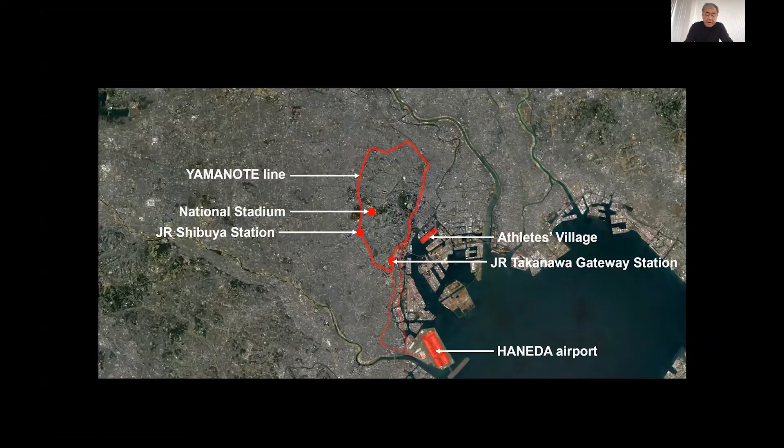Before COVID, everybody began to think the city is too big, the towers are too tall, and we are too far from nature. So the basic idea for the stadium was how to go back to nature, how to go back to natural materials, and how to open the building to the environment.

Our solution was to use wood, especially local wood. Japan is a country of forests—still now, 70% of our land is forest. I want to show this unique environment of Japan.

We used wood from 47 prefectures of Japan—this is cedar. Each cedar from the 47 prefectures has a different color, different texture, and different grain. I want to show that kind of diversity—even in a small country, we have such diversity.

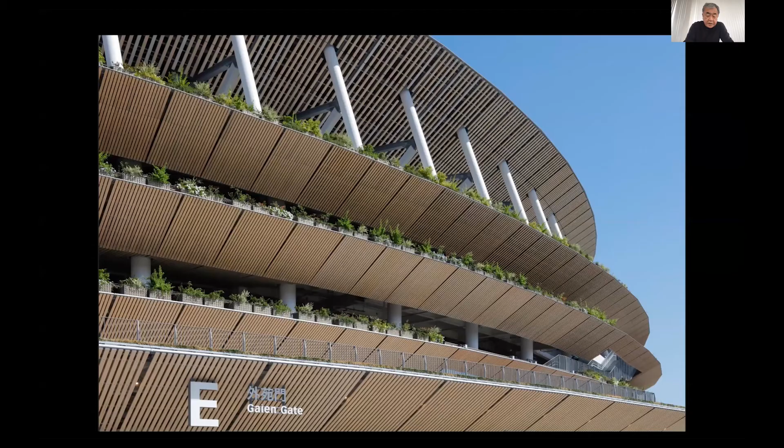Already 1,400 years have passed since the building's completion, but it's still surviving. The secret is the unique section of the building—the wood is protected by this unique section, and people can also enjoy the beauty of the wood, the beauty of its detail and texture. So I want to do the same magic for our building.

We also tried to integrate vegetation with the material and the big building. Even for this big building, we believe we can integrate it with the environment and nature. We also tried to create public space in the stadium.

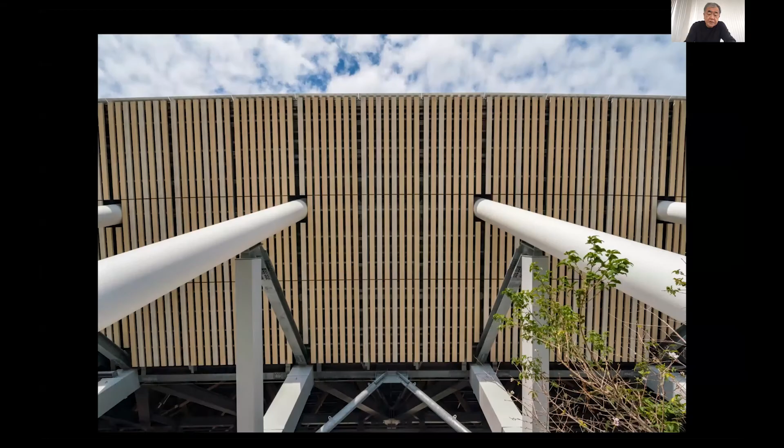Most sports buildings are enclosed when people aren't doing a sports event, but this stadium is open to the public 365 days a year. Openness and publicness are the themes of this building, and even at nighttime, it's just open to the public.

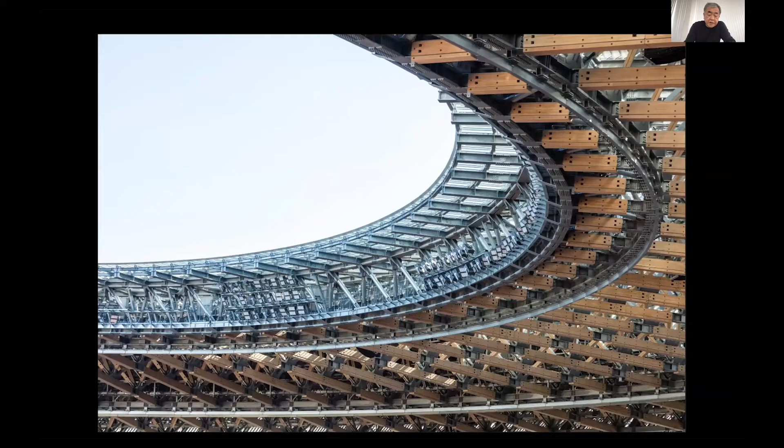We tried many new materials for the building. The roof is supported by a composite structure of wood and steel, so we could achieve lightness through this kind of composite structure system. At the edge of the roof, we have a new transparent type of photovoltaic panel—it looks like normal glass, but it has the same efficiency as a normal photovoltaic panel.

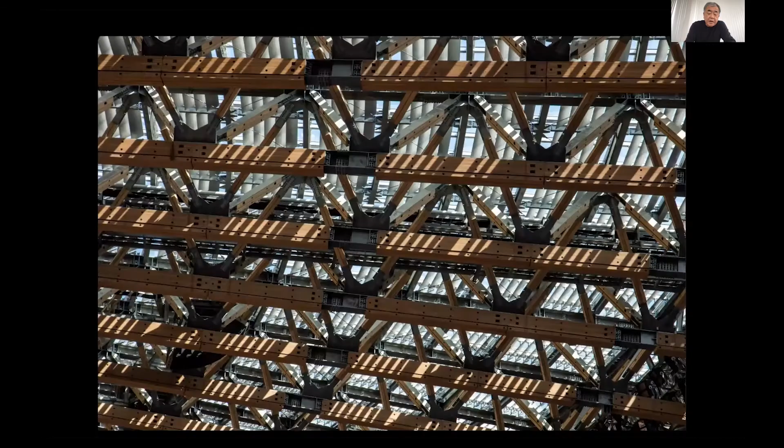And our idea is by using new design, by using new technology, and going back to nature again. Before COVID, we began to think like this, but COVID pushed us further in this direction. COVID is a big turning point of history, I think.

Generally, the history of Homo sapiens goes from centralization to the city. We started from hunters and gatherers, then agriculture started, then industrialization started, and the big cities started, taller and taller. But finally, this kind of centralization brought us to a big crisis.

The theme after COVID is how to go back to nature and how to go back to the forest. This stadium can be one example of that kind of new direction.

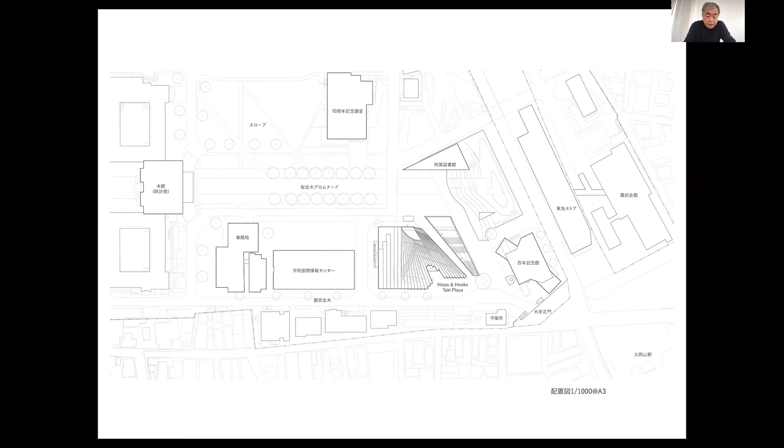Besides the stadium, we are trying to find another solution for how to go back to nature. This is a very new project we did for Tokyo Tech, a big university in the center of Tokyo. We designed this hill-like building, and the building merges with the surface of the ground—it's not outstanding at all.

This is the detail of the building. Topography is the theme of our architectural design, and at the same time, we are very much interested in the detail of the ground surface.

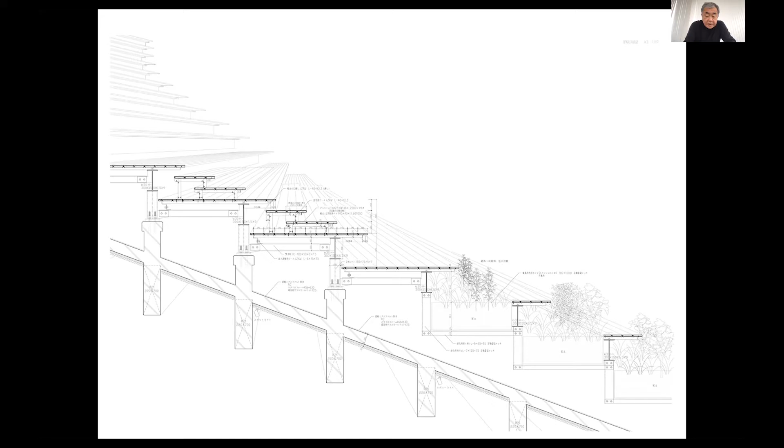Today, I want to pass this theme to Balazs Bognar. We've been working together for a long time, and he sometimes brings this idea to a different context. I think this cultural exchange is very interesting for us. I want to talk about one example of this cultural exchange.

Frank Lloyd Wright—maybe you know that great architect—he came to Japan many times, and he learned the Japanese traditional architecture, and he tried to apply those Japanese ideas to an American context.

We also try to do the same exchange in a different period, and Balazs is working on that kind of trial. Maybe he will explain the process of that kind of exchange and translation. After COVID, that kind of exchange will be more important than before, and today he can talk about what we can do after COVID.

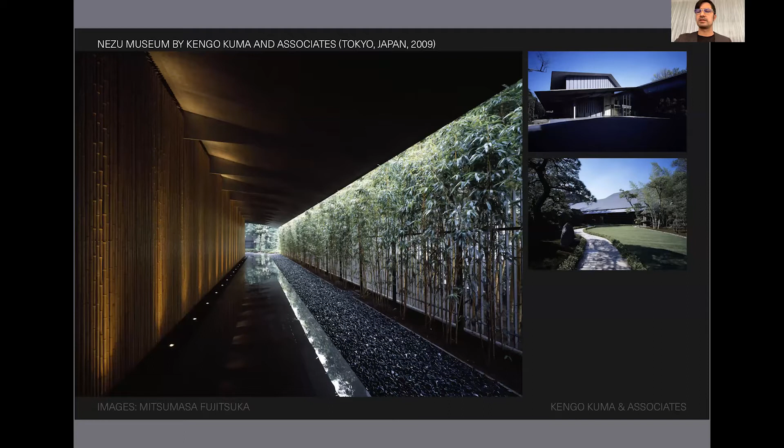I'm going to bring you now to Portland very briefly, where if we were to summarize the project in one phrase, it's that we simply reconnected a pathway. We connected the dots. Let's spend a brief moment here.

What we simply did was connect all of those dots so that the formal entry, the ticketing, was brought all the way down to the road, unlike before. The preamble to the antique gate was set up in a more honorific way. And then before one enters the main gate, the upper main gate, we provided a village, a series of buildings that framed a space and framed the existing gardens beyond. Let's take a really, really brief walk up that hill.

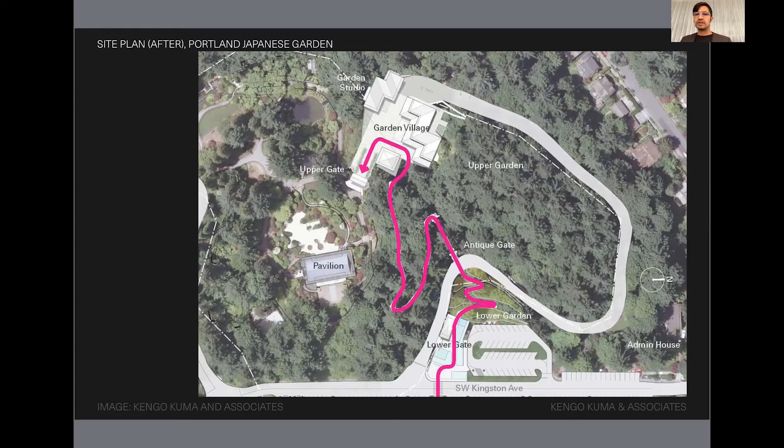I'd like to give you a sense that it's about the space, it's the continuity, it's about an approach and a sequence more than the individual buildings themselves.

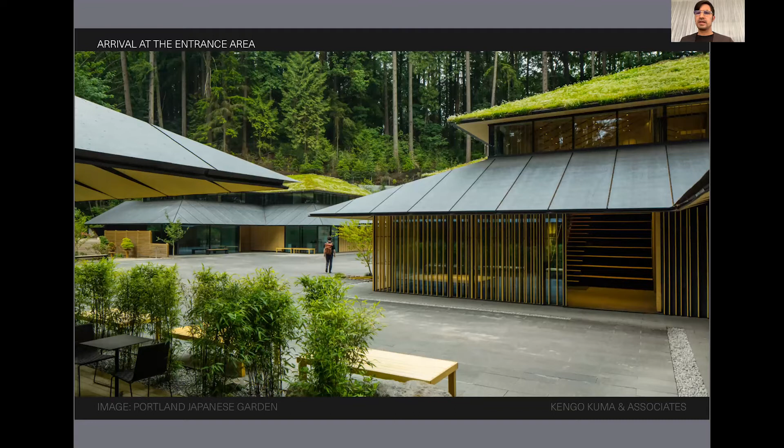The ascent leads us to the tea house over there on the left, again peeking out behind the tree, reminiscent of Kyoto's Kiyomizu-dera, peeking out over the ravine. The entry there is flanked by the two buildings, the third one there in the beyond. And again, it's really important here: it's not about a monolithic architecture, it's about the space that it defines.

Let's take a look at that in plan. I've artificially highlighted the zigzagging so you can see that the roof line, the way that it's modulated, basically disappears back into the landscape. It defines two key spaces: that kind of driveway drop-off courtyard, what we call the second main entry over there to the left, upper left, and the courtyard over there on the lower right. The arrow pointing out there was the view from the previous slide, and that's the position of the main gate.

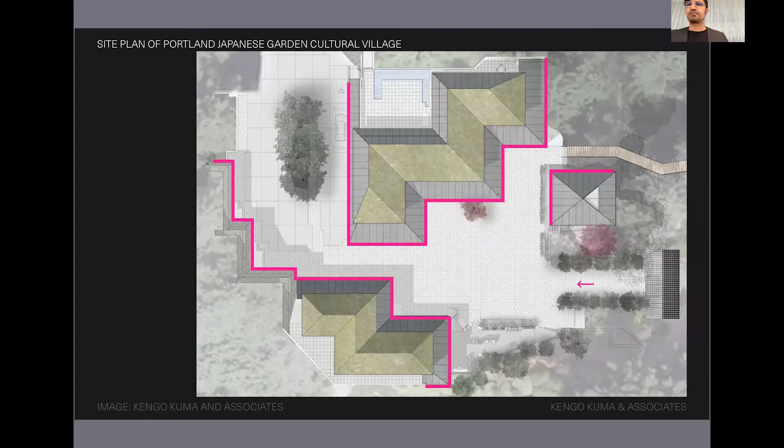This is also echoing Kyoto's Katsura Villa, and of course from many, many centuries before. This is precisely the same scale as the previous slide, and the north arrow orientation is roughly the same as well, so you can see that there are kind of reverberations across time.

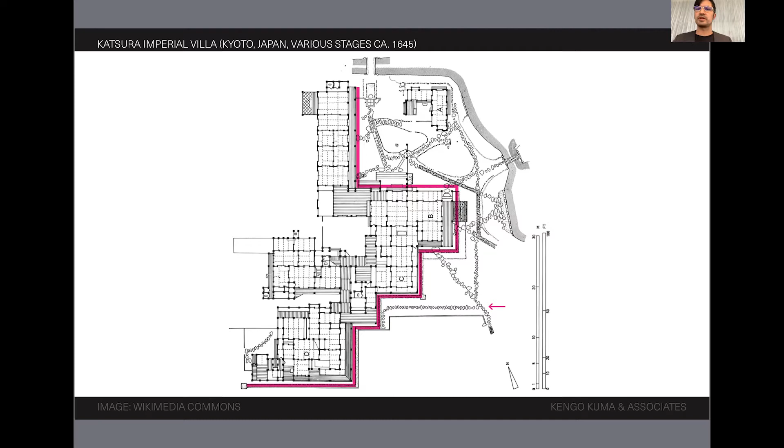This kind of technique is really important in being able to hold space. The zigzagging line in Japanese is called ganko yane, the formation of the flying geese. That magenta arrow will then give us the view on the next page. You can see that a larger volume is broken down into smaller masses by way of the roof line. It also starts to define the space, kind of what I like to call the inside crook of the elbow, and creates a whole series of outside corners as well. It gives a sense of depth, a sense of intimacy and human scale.

The big difference, of course, is that Katsura Villa was elevated on a level much like a piano nobile, whereas a similar sort of view in Portland Japanese Garden is contiguous with the ground. So there's a free flow of people and activities across the corners and across the boundaries.

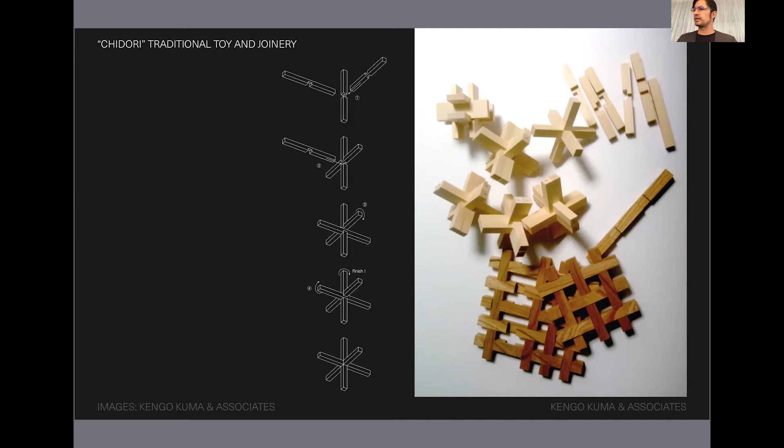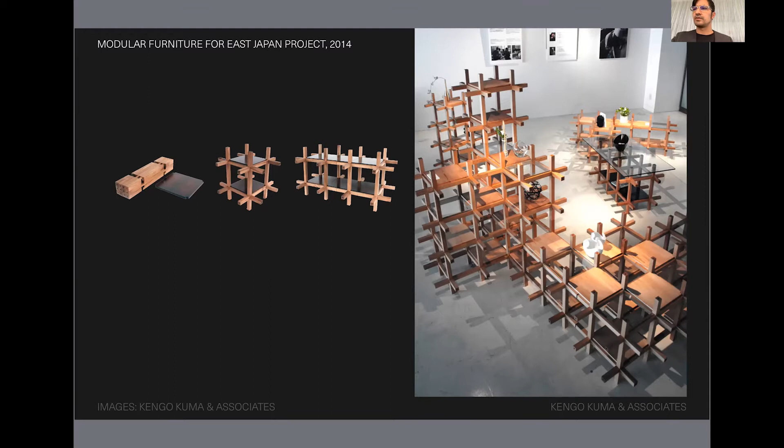We asked ourselves, what happens if you take that same joint and make a modular furniture set from it? This is sort of an experiment. For those following the dates, please note this is not intentionally chronological, because the ideas come about and develop at different stages. What I'm really interested in showing you is a kind of evolution—work that is not so much about an individual design, but the way it grows and tunes itself over several projects. There's a photograph of the single piece against a kind of palette of several of these pieces, with the notches shown in the background.

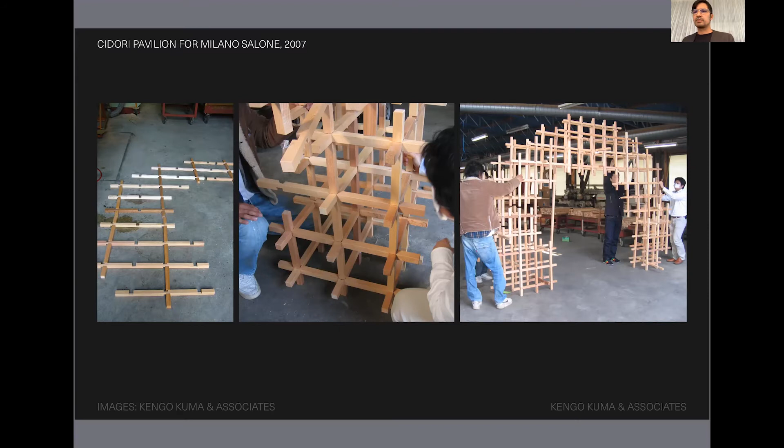And this is for Salone in Milano in 2007. You can see here the system of putting it together requires no mechanical fastenings or adhesives—you just lay out the pieces, slot and rotate them together, and the layers of the pavilion are put together by just a few people. There is the pavilion in its final form.

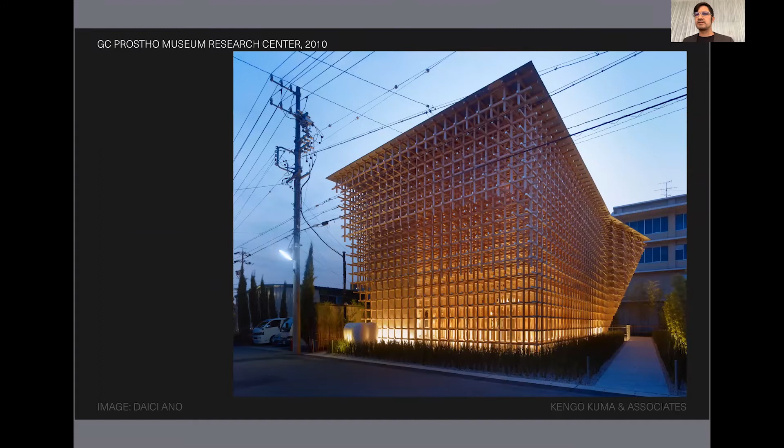If you increase the scale, going from pavilion, an experiment at a smaller scale, growing to a larger scale here with architecture, this is GC Prostho. That same dimension is carried through to this building with the 2 inch by 2 inch components carried over at 0.5 meter spacing, which is just a little under 2 feet.

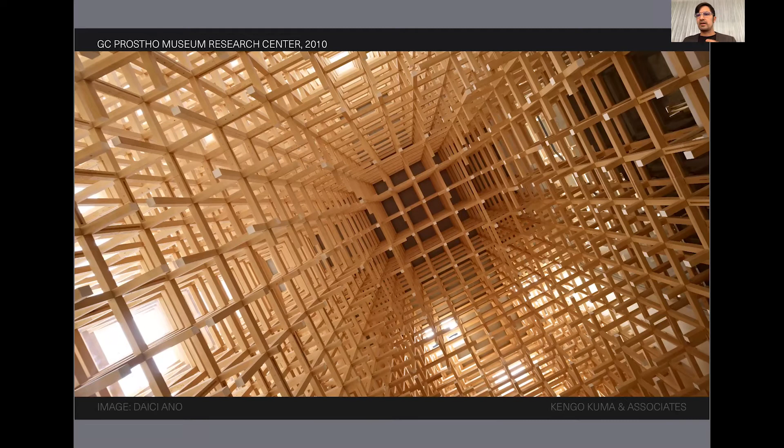This building is entirely defined by this lattice. It's a structural grid, and it's treated, so it's fireproof. The actual physical boundary of glass is slotted between and interspersed so that you would never really detect it visually. This is a look up into the space. You can see it's almost a magical view, really talking about infinity. It's purely about that joint being repeated.

The region after World War II saw a resurgence of the cedar trees. The reason this is important is that there was a surplus, right? There was deforestation, and then the trees were replanted. They're fast growing. The surplus compelled the city to ask offices such as ours how is it that we can display some of these? How can we show our technique?

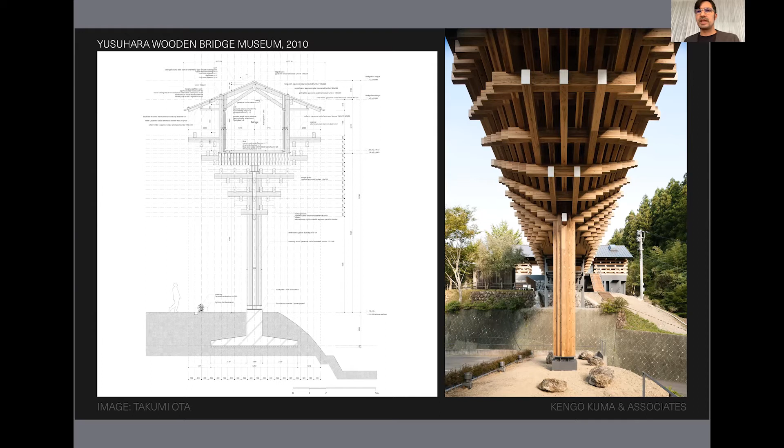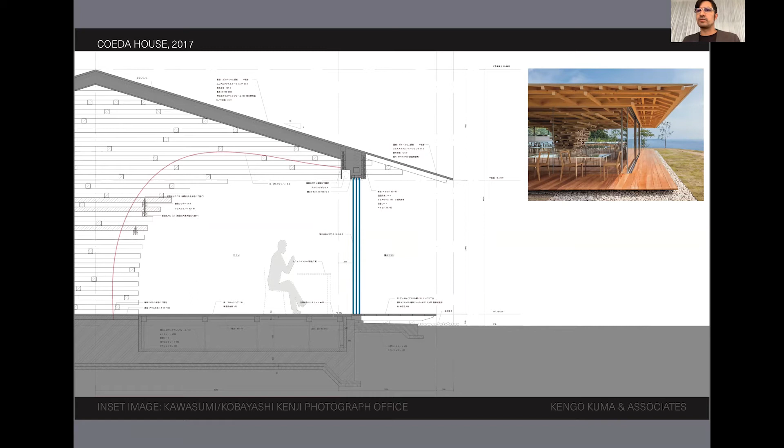If you look closely at the section, there are two vertical lines within the body of that assembly, and those are the few mechanical fastenings of the central pylon, as it were, in the middle. At night, all of this disappears, so really we're talking about an assembly, a kind of light piling of wood, and the only metal columns that appear to be mullions occur at the 4 corners. Again, those dimensions have been minimized to a nearly impossible 3 inches by 3 inches, just to show off the capability of the material.

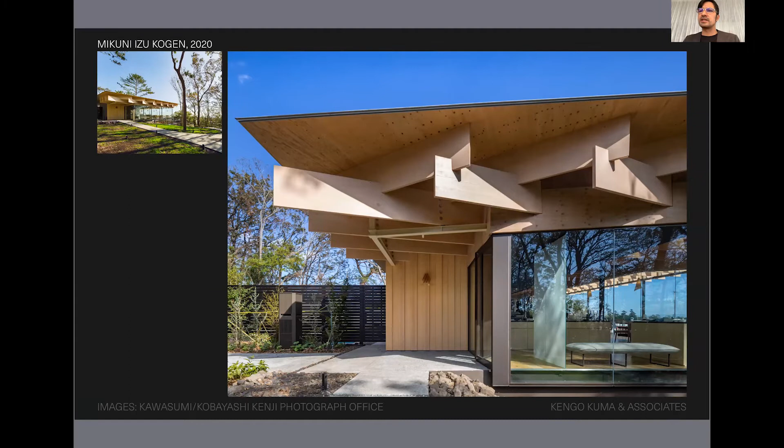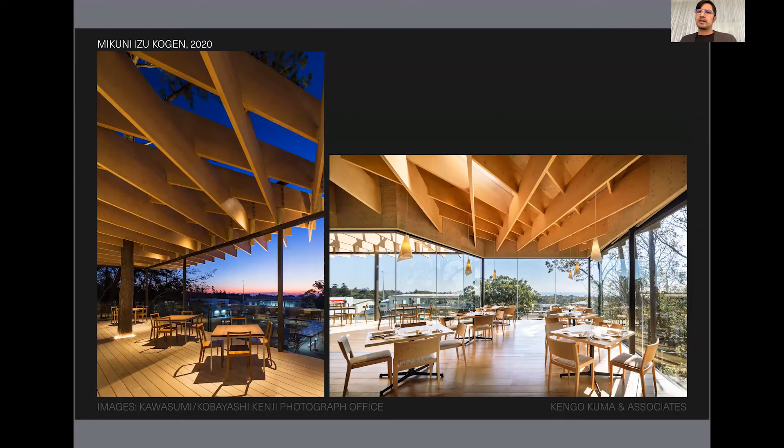That detail is made possible here. If we zoom in on the entry area, we can see that these larger, thinner, and flatter boards have slotted together up at the top, creating effectively two structural layers that continue all the way through. They span up to about 11.5 meters at their longest point. Be that as it may, all of these force lines and the way in which these two layers cover the space draw the eye outward towards the panorama beyond.

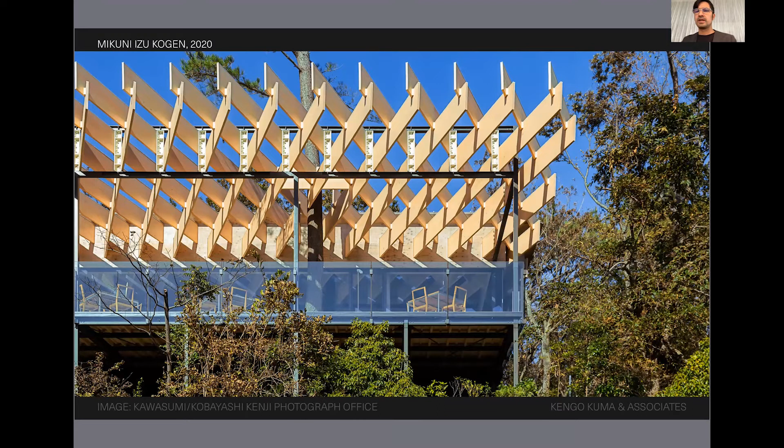There is that view again, and you can see there's a hybrid steel and wooden frame assembly there, primarily taken care of by the wood, but we've also provided this hybrid combination structure. I'm going to take that same detail now, and our question is, what happens if we simply flex all of those lines into three directions?

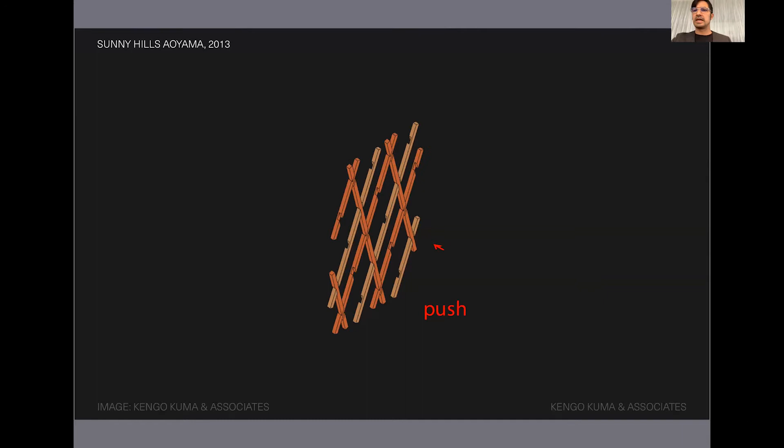This depends on a kind of slotting or joinery technique called jigoku gumi. Jigoku gumi, if you took that almost as the literal translation, means a kind of hell joinery. And it's not hellish because of its difficulty. It is so because once it's assembled, you cannot take it apart again. So there's its first layer. There's its second layer as it comes through. And just remember, with each subsequent layer, we are reinforcing the direction of stability.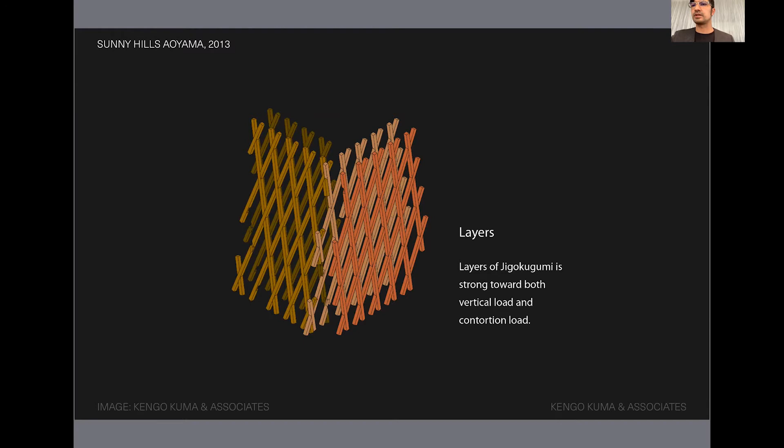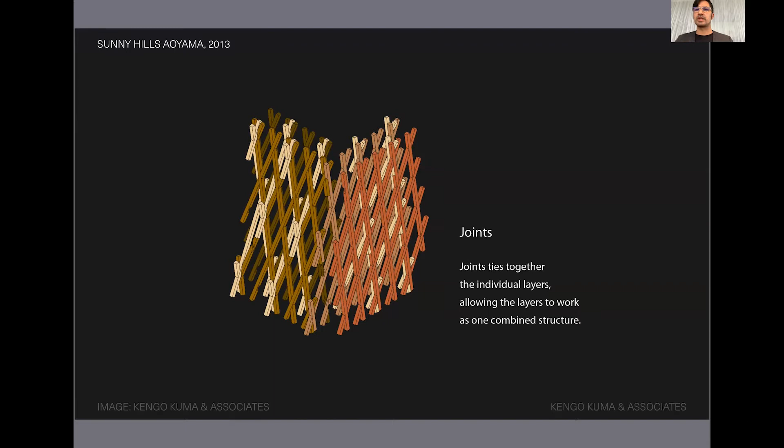If we then add 2 layers of this and turn the corner, we are starting to introduce stiffness at the corners. And then again, they are connected in that third intermediary direction with that lighter layer there to provide stiffness that then basically creates a unified whole.

This is a picture of that section as it's all come together. Again, for those of you interested, all of this was modeled very heavily in Rhino and going back and forth between the engineers. Part of the aspect of the hellishness was maybe in the number of iterations to get that right. You can see though, that beyond just drawing and calculation, you can see that kind of cloud-like ephemeral effect on the left.

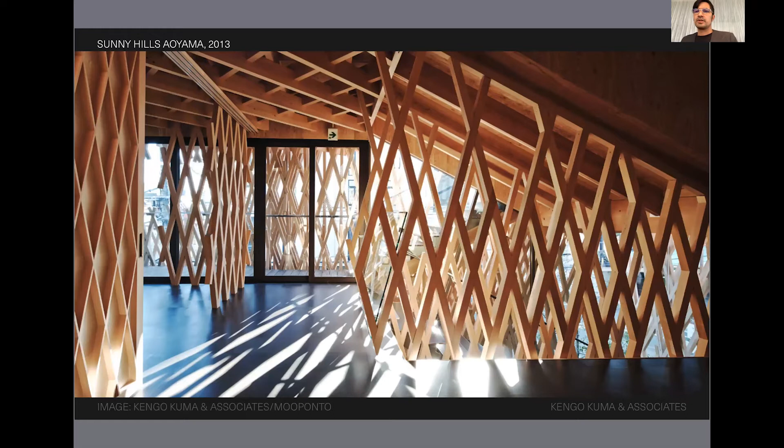Here you can see that structure, that joint I'd shown you before. Earlier it was a toy, then it became a smaller pavilion, then a bridge, then a series of these smaller structures. That now is talking about the joinery not only as a material atmosphere, it's an overall environment, it's about the light, it's about the structure, it's the skin. It's now doing a number of different things, almost in a redundant manner, but it's now gone from kind of an engineered assembly to a level of poetry that we do try to achieve.

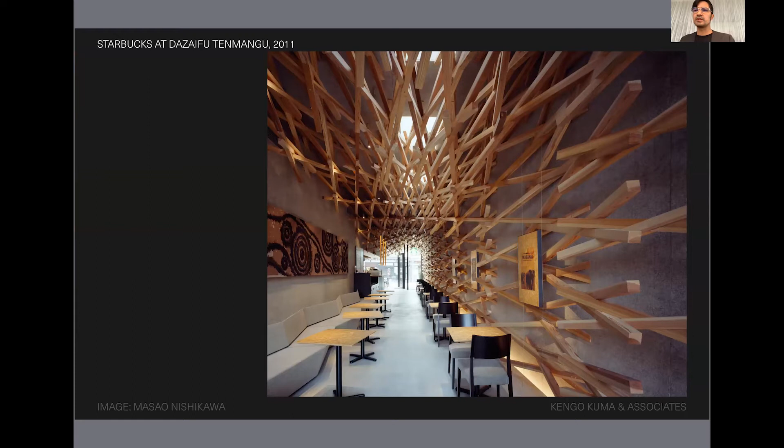What happens if we simplify some of that? Let's take that same detail, pull it apart a bit, turn it to the side. We are now at Starbucks in Dazaifu Tenman-gu. This is in Fukuoka Prefecture, and it's again along a major thoroughfare leading to the shrine. You can see here that material has been pulled apart almost to a much lighter degree, so the density is really quite light compared to what we'd seen at Sunny Hills.

This is not as structural as in the previous example. It does borderline on decoration, but what we're after here is a particular showing of the material. Remember, even though we can model this digitally, somebody has to make this.

In our case, we were working very closely with craftsmen to be able to cut by hand tools that three-dimensional joint, and to be able to cast it over the space of the cafe. So that's very important.

It is self-supporting, but it doesn't give structure to the roof above. You can see the light coming down through the skylight to show that off. So there's the view from the street.

Some key points to remember here. We've taken a look at a single joint, and again, this is one of many. It's an idea that grows across different scales. We tune parameters, adjust them, try to investigate the possibilities and limits of material, especially with regard to where the material came from, its location, and simply playing with the sizes.

It's an evolution. It's an economy of material, and we hope it has to do with a kind of spatial evocation, and it's about human construction. Really it has to do with the translation of idea or imagination to modeling, experimenting, and calculating, to somebody making that. And that's very important.

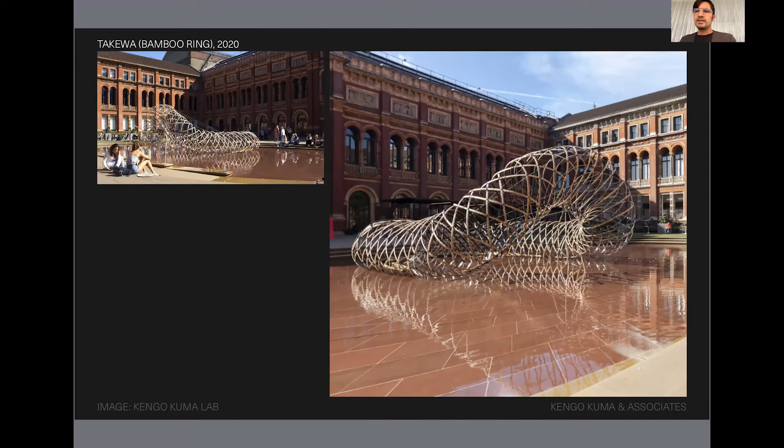I would do well to credit the Kengo Kuma Research Laboratory at University of Tokyo; they worked very closely with us in some of these investigations. These rings are all about 1.8 meters in diameter, and there are 120 of them, all constituted by a series of bamboo rings.

Here you can see a couple of the students assembling them. The coils are held together by zip ties.

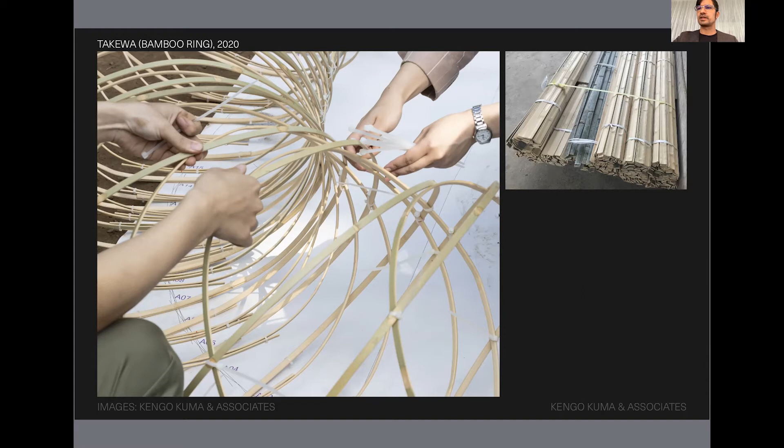Very low tech, very low budget, and this is something on which we pride ourselves with regard to this approach. This is a 1/3 scale model, so we can see what it is that we're doing. The cardboard cutout of the person there is actually quite short.

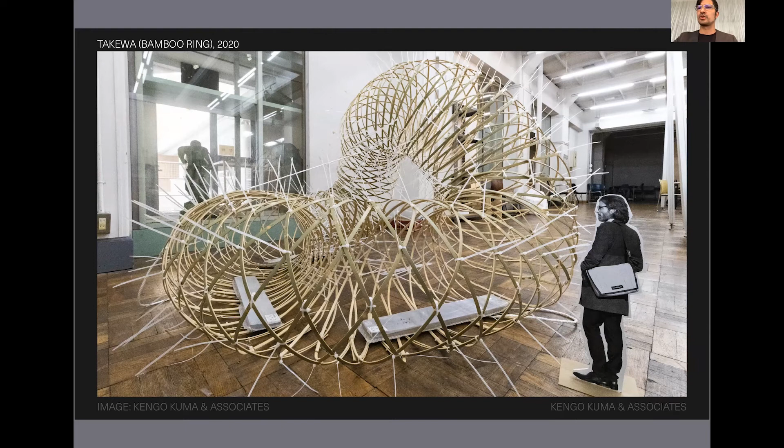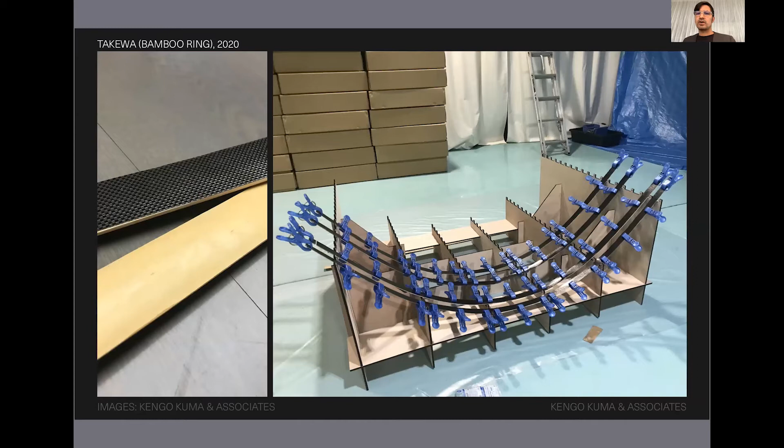There's that same view. You'll notice a few differences here, that the same coils manifest themselves with the aid of what appear to be shadowy strips at the back of each bamboo. It's a carbon fiber backing material that increases its durability, its tensile strength, and the overall strength of the shape.

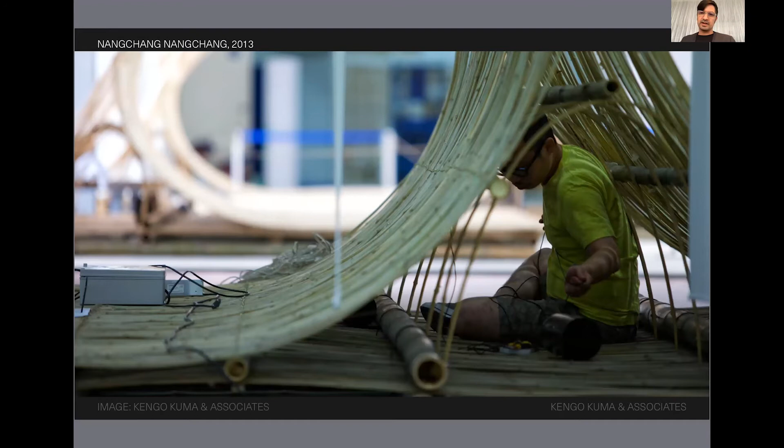Let's take now our tour to Korea, where that same bamboo is being manifest in a slightly different manner. This is in a gallery, it's an exhibition. And what we've done is we've taken very thin bamboo strips. They've been cut from a 3 centimeter diameter species of bamboo. And the reason why that's important is, as opposed to the typical 6 centimeter diameter bamboo, if you cut them into small strips, there's a particular flexibility while retaining the strength.

You can see here, I'm starting to suggest that that provides these waves that are lit from within. It's a kind of hangout space. It's a gallery - those curves, I apologize, it's a little light on screen here. Those curves are tuned to the program, to the location within the gallery, so they're either concave or convex, or maybe tube-like or tunnel-like.

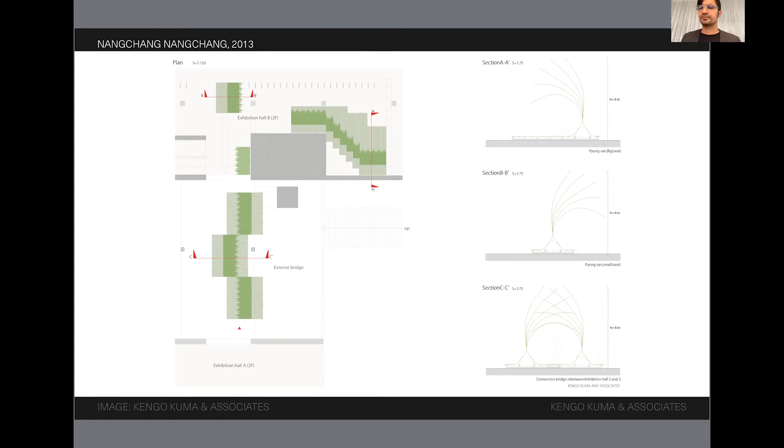And you can see how that leads from - there's an entry from the gallery beyond, and one would walk across the bamboo surface beyond these wave-like structures. Indeed, the effect is very much a kind of high-tech and low-tech mishmash, where it's about a refinement of a material, but in fact, it's very much about something that's readily available, and there's a particular roughness that we allow to shine through.

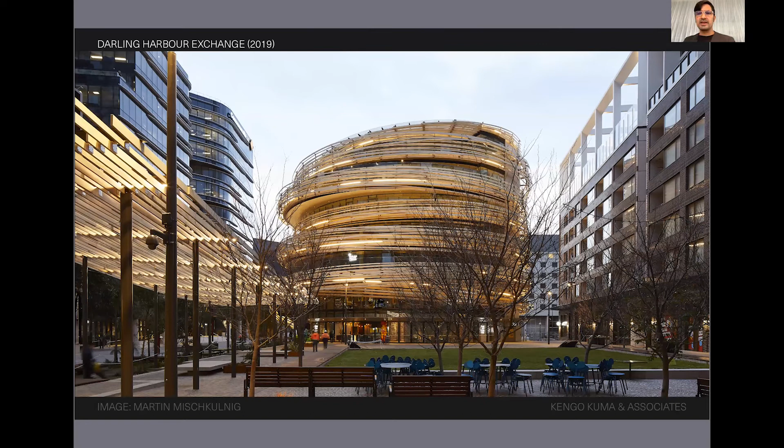As you've seen in the previous series, what happens if we jump scales? Now we're going all the way to Sydney, where we're at the Darling Harbour Exchange. This is a central location within the city. Just to give you a bit of orientation, look at the larger image for the moment. There's Sydney's Opera House over there on the left, and you can see there the sequential zoomed-in locations. There's Darling Harbour just to the north - we're down under, so it's to the north of our site.

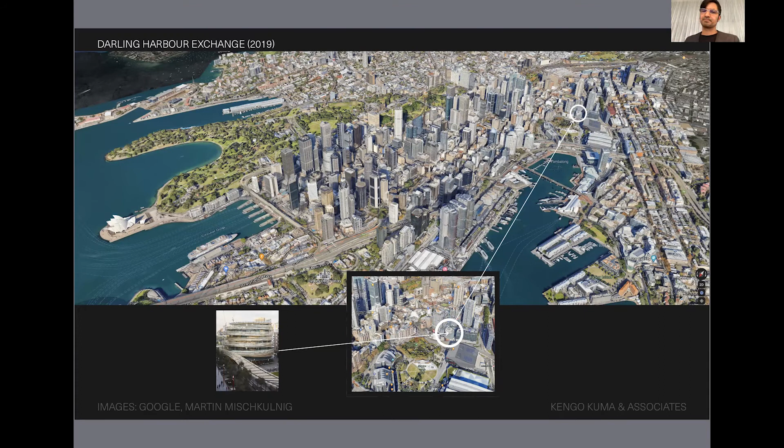You can see a competition image there on the lower left, the actual situation as it is today. The level of openness of the structure varies depending on where you are in the site. It's surrounded by a series of larger office buildings and residences, so it's really a kind of surprising moment for the rest of the precinct.

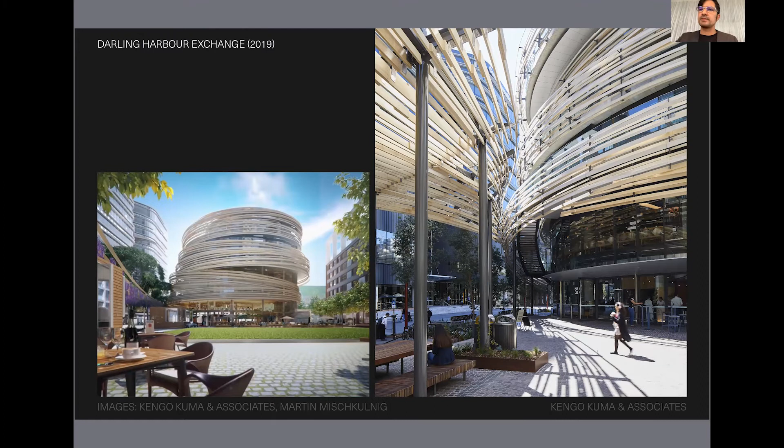What is it? It's a community center, a school, a library - kind of a hub for all of these different buildings surrounding it. What you see on screen here is a bit of a before and after. The image on the left shows what took place before, and the image on the right is the current situation.

The reason why this is important is that you can see between some of our renders to the constructed work, we try to tune some of the openings, the positioning of some of these big stranded filaments all the way around. Those, of course, are not woven bamboo - they are, in fact, Accoya, which is a kind of engineered, modified wood. It's been acetylated, which basically is to say we've taken softwood and we've made it hard through a natural process. It's a proprietary product, but what's important about this is that it's retained a particular durability to have wood on the outside of a building, and the species have been combined from a locally available source.

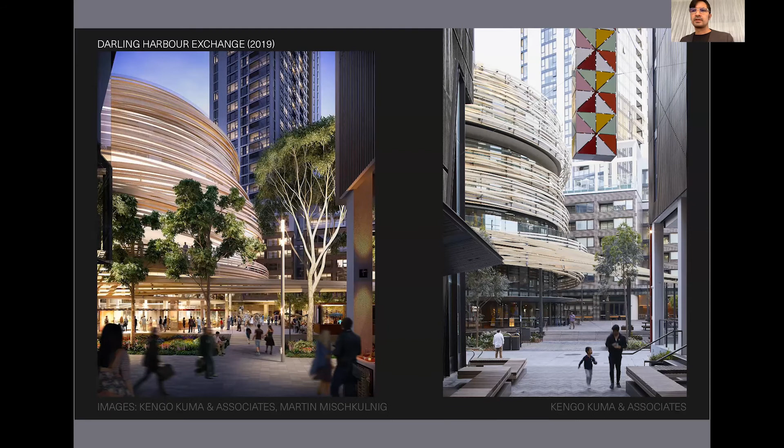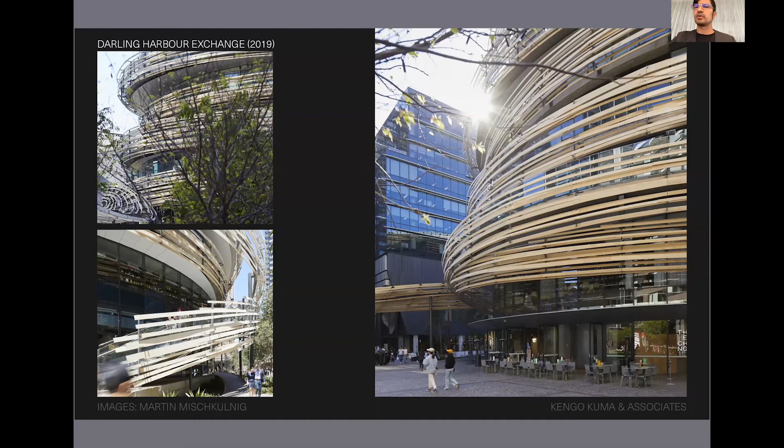Here you can see a few of these images, just to give a sense that this screen all the way around is a brise-soleil, it's the handrail, it's a whole number of things. We're trying to use one architectural device to cover and reveal, to shade and so forth. You can see that pergola on the right is actually an extension from the rest of the building—almost a single vocabulary that morphs and changes based on where it's situated in the building.

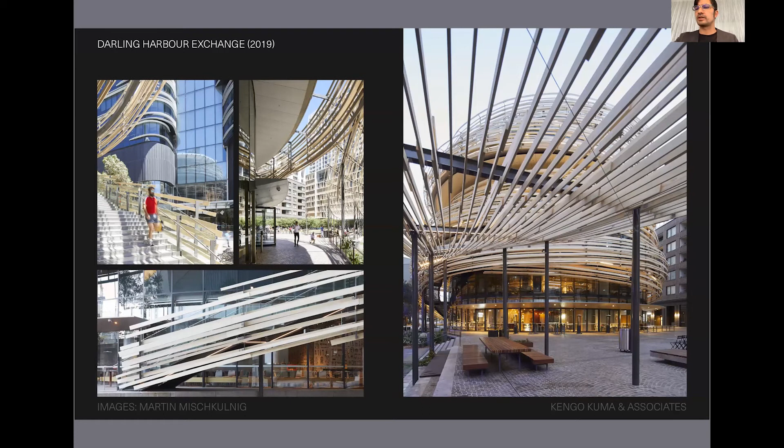I'll leave this particular project with a detail of that view. As my role in the office, I'm always interested in how we achieve a particular refinement, especially going from the rendering and the imagination to the executed work. If you look at the image on the left, some pieces are lapped, and when they come together in a butt joint, they're actually not very smooth at all. There's a tolerance for roughness or low resolution compared to some of the high resolution concepts we put forward—there's a back and forth between those achievements that I think is really quite revealing.

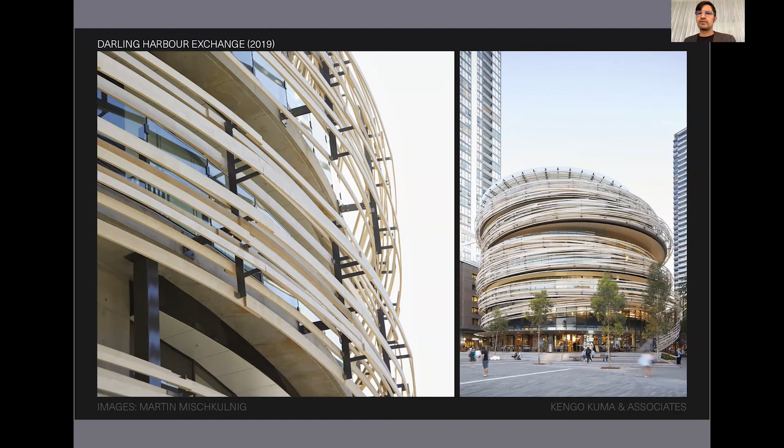Let's talk a little bit about the air around us, which I know probably isn't your typical material to deal with. We do experiment with this though, and I'll lead you through a series of small pavilions. This is KXK, which is again an experiment in materials that are not the typical piece.

To give you a sense of scale, that aperture you see on the left-hand side is enough for somebody to crawl into and then stand. It's made of three materials: one is shape memory alloy, shown in those larger rings in the central diagram. The little squiggly lines are basically an EVA sheet—a kind of plastic with a web-like character. Then there's PVC piping that connects the two systems together.

The reason this is important—and I'm giving away the punchline now—is that the shape memory alloy changes the overall profile of this pavilion depending on the surrounding ambient temperature. In the lower right diagrams, the person standing there at 30 degrees Celsius sees the complete bubble, whereas if it were to lower by another 20 degrees, the bubble starts to deform. This has particular implications for a nature-derived shape-making technique.

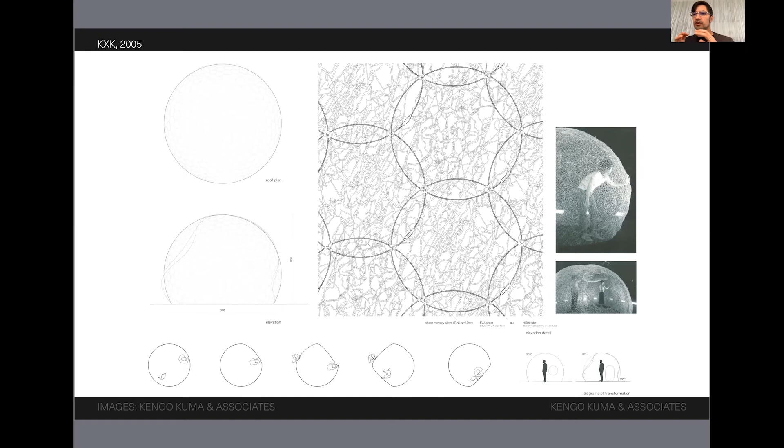You can see the close-up of the detail, the entry of the aperture, and the kind of ghosted shaded rings of the shape memory alloy. It's almost been woven together as a fabric, a self-supporting fabric.

Let's take a look at another weird looking bubble of a structure here. This is Casa Umbrella from 2008, an invitation to consider what it would be like to put together a beautiful temporary shelter. It's almost like a geodesic dome—sort of Kengo Kuma meets Bucky Fuller. There's a fibrous woven quality to the material, which is actually Tyvek, the material used in those packages shipped around through FedEx and so forth.

What we've done is taken as a unit an umbrella. It's collapsible, relatively low tech, and low cost, and we can zip them all together into this geometric shape. The sequence at the bottom shows how that all goes together.

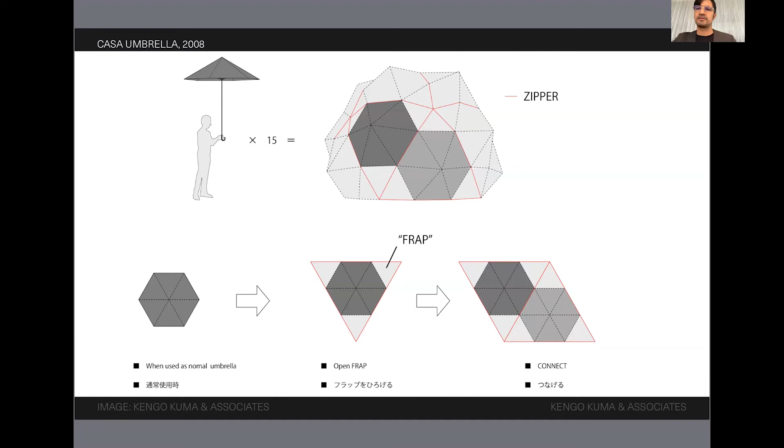The umbrellas each have—it's mislabeled there, but it's a flap. If we look at the detail, you can see the spokes of the umbrella on the left, the brass fittings and the zipper in the middle image, and the way the flap comes together with all these pieces in this geometric situation on the right. It can be assembled by a small group of people, like students, and it gets put together.

It really does echo a temporary way of life. You can hang up your backpack, your coat, a chair—the flaps open up to provide doors and windows, but it's really about compacting everything you might need for a temporary way of life for a short amount of time. That has particular implications for compactness and so forth.

I'm going to switch gears now and talk to you about this funny little guy here. If I were to tell you that this was a tea house in a package, you might not necessarily believe me, but allow me to tell you what it is we're looking at.

Very light, very ghost-like, not unlike the silhouette from a Pac-Man of days of yore. But what you can see here, there's a helium-filled balloon draped by an extremely light fabric called super organza. That weighs approximately 11 grams per square meter, or just a fraction of a pound per 10 square feet. You can see that same platform resides at the bottom, and it's very, very simple.

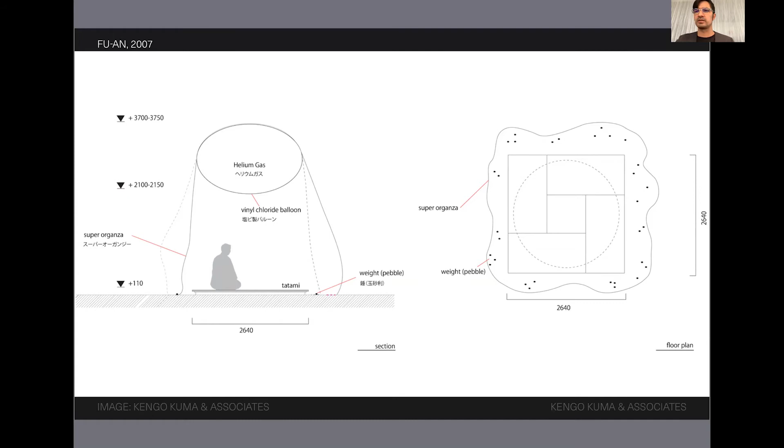You've got the platform just hovering above the ground, the helium gas-filled balloon above. Over that is draped the super organza, held down by a series of small stones. In the diagrams there on the plan and section, you can see it's listed as pebbles, so they're very small. Let's take a very close look here. You can see the tea master entering in—it's basically kind of a parting of the curtains. The super organza comes down, and it's just held down by a few stones. So the territory there, this space is defined by almost nothing.

Let's take a look at another unusual tea house. This again is back over to Frankfurt. This bulbous creature here is made by a kind of weldable PTFE. This is the approach—you can see the opening to the tea house beyond there. The diagrams are a little bit small, but the important thing to note is that you have a site.

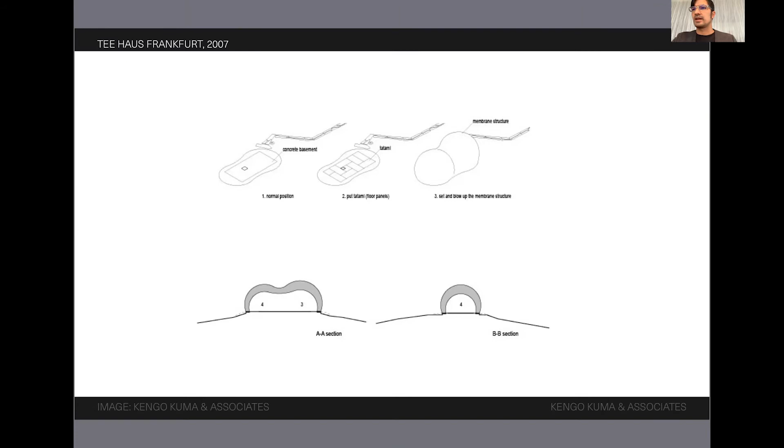Following along the top diagrams there, you define the territory, lay down the tatami, and then you basically inflate the structure. The PTFE is double-walled. It's held together by a series of polyester strings, so it's both strong and stable, but also flexible and soft.

You can see here the effect on the inside allows for light to come in. We've done that similar detail where the lower perimeter has been illuminated by integrated lighting. You can see a group of people there for a full ceremony in the upper right, and that dappled light quality coming through in the lower right image is reminiscent of komorebi in Japanese culture.

And there it is at night. It's basically a glowing bubble—it's something out of nothing. It's very, very minimalist. Let's continue to talk about bubbles and minimalism and air.

I'm going to take you to Hokkaido, where we have an experimental residence in a place called Memu Meadows. Normally, Hokkaido is actually quite harsh in the wintertime, and the elements are quite strong there, and you can feel that. It's popular for skiing. It's probably less obvious for people staying there in the long run.

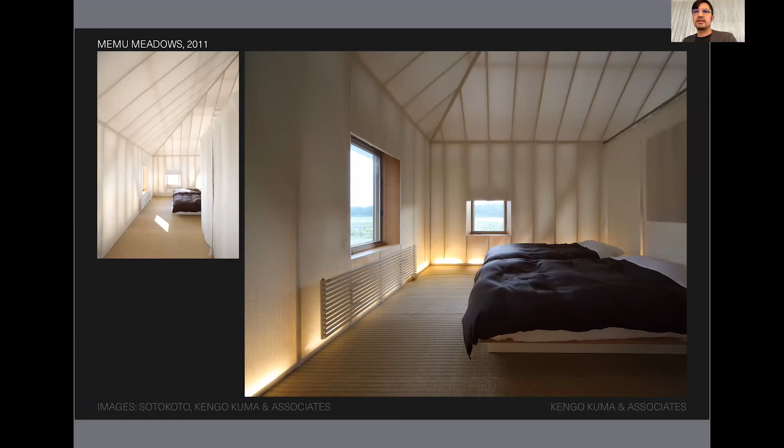This is the view of the interior of the house, and immediately you're starting to realize that the house's walls are translucent. Basically, what we've done is put an envelope of air on a foundation, and I'll get to that in a moment. That material is a similar kind of glass fiber fabric. This inner layer is glass fiber fabric, and on the exterior, it's a polyester fluorocarbon coated membrane.

The in-between structure is a kind of skeleton of larch framing. Here you can see Kuma-san over on the left, so you can see that the scale of the space is quite significant. On the right, I've colored in this air layer all the way around.

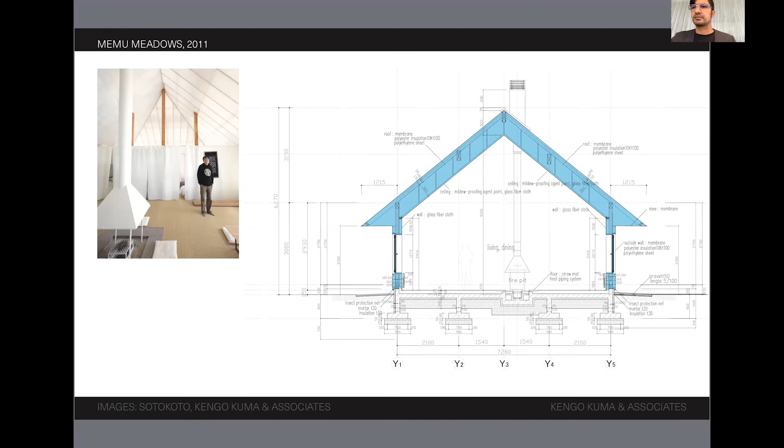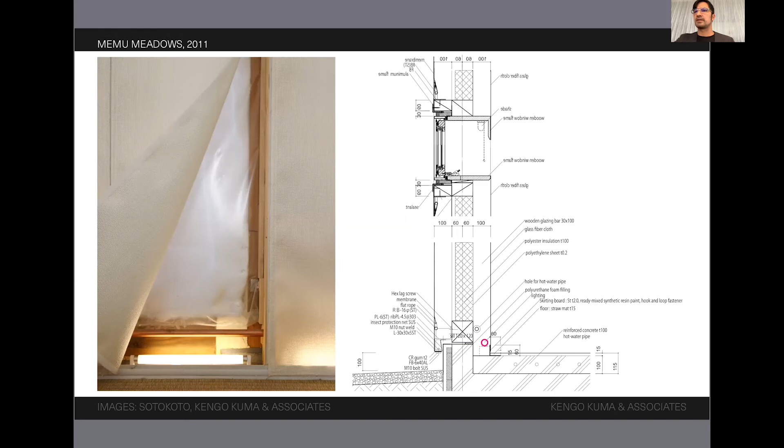That sense of membrane and openness and the connection to the air all the way around is now capped by a project that we did for one of the newest train stations in Tokyo.

It's Takanawa Gateway Station, situated between Tamachi Station and Shinagawa Station. You can see there's a very large canopy, all Teflon, but with its triangulated surfaces it appears almost as though it could have been a folded piece of paper. You can get that sense from below as well.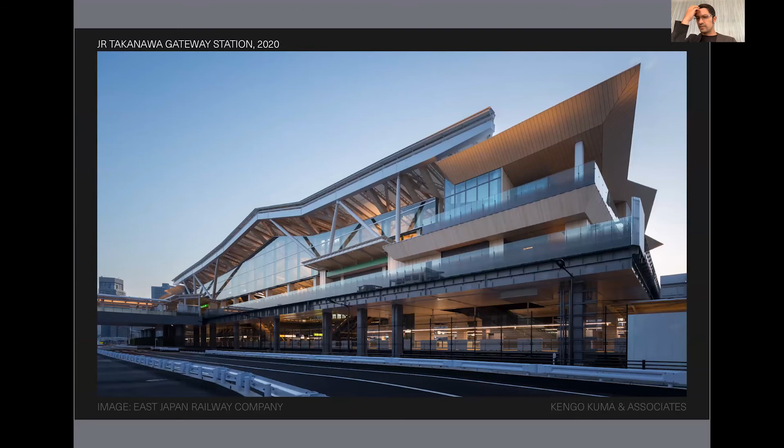We've got a series of layered concourses covering the space in a multi-level structure. This is the view from within. If we were to walk on the concourse, the entire canopy is billowing above us, and you'll note that it's open to the air and elements at all levels. You can see the section below with the trains and cars at the lower level, and the concourse is where we're at eye level.

Above, what's really interesting, and bears connection to the stadium Kuma-san mentioned, is that the structure is hybrid—steel and wood. That wood is cedar, which as we know from earlier slides is widely available throughout Japan. By night, we take that same ephemeral quality, illuminating from within and emphasizing its presence within the skyline.

And there it is at sunset. You can see the very thin, almost zigzagging, lightly sloped lines. There you can see Rainbow Bridge in the background, so you can understand its situation within the city. It's a significant interchange, and we've tried to do it with almost the minimum that we possibly could.

To bring this chapter to a close, I'd like to emphasize the points of lightness and softness, achieved through experimentation. Basic natural elements such as air and temperature are important building materials. Sustainable practices are cultural practices—a theme running throughout the entire commentary. What's more important is that sustainability is really about human experience, about our place in the world, and about understanding our environment.

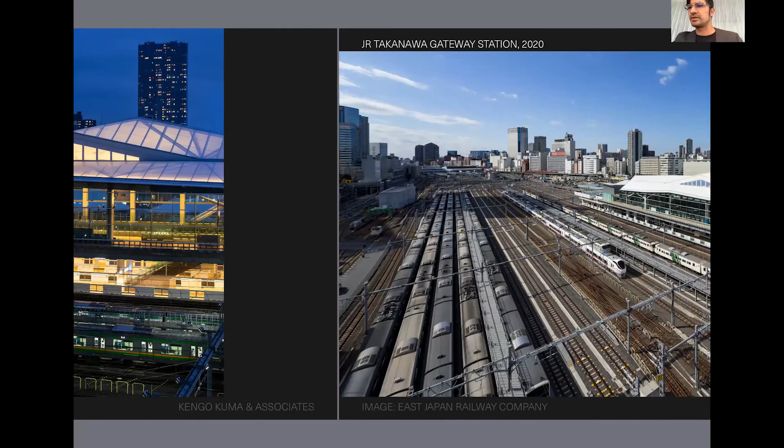Just in case, because the thing is, even though we talk about work, it's also—this isn't really working for me here. There we go. I think I have to let this spool again.

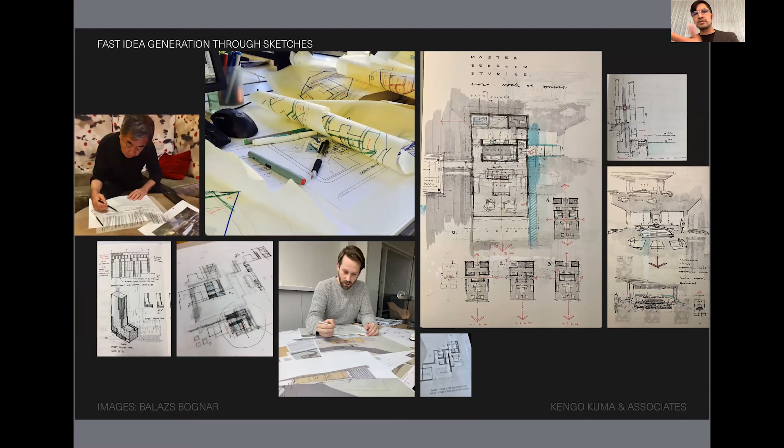What's really important is that when we work in the office, it's never really just about the work. You can see there's a huge variety of people with different opinions, backgrounds, and so forth. We are messy, we get really into the guts of things, we draw things, we sketch things. There's Kuma-san, a friend of mine who I work together with on a lot of US projects. We do things by hand, by advanced digital testing, and so forth. None of the individual tools by themselves are all that interesting, because what we're really interested in is the combination of it all.

As I mentioned before, we build a lot of models. That central photograph there with his back turned, Kuma-san is reviewing the models—deciding which will be kept for archive and which will be pitched. Of the hundreds we produce each year, only a very small percentage go into archive.

What's really important to note is that we will never fully represent the final architecture until it's done, and maybe not even then. So we have these aspects that approximate the space, and we do it as best as we possibly can across a number of different media, so that we can say, yes, we feel pretty good about what we're setting forward. So thanks so much for that question.

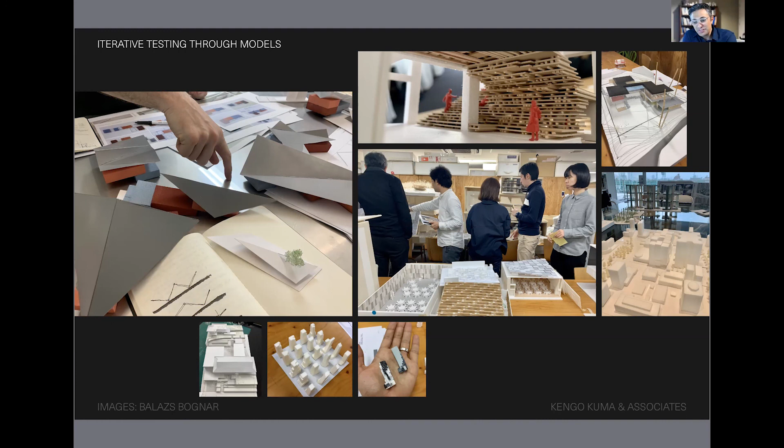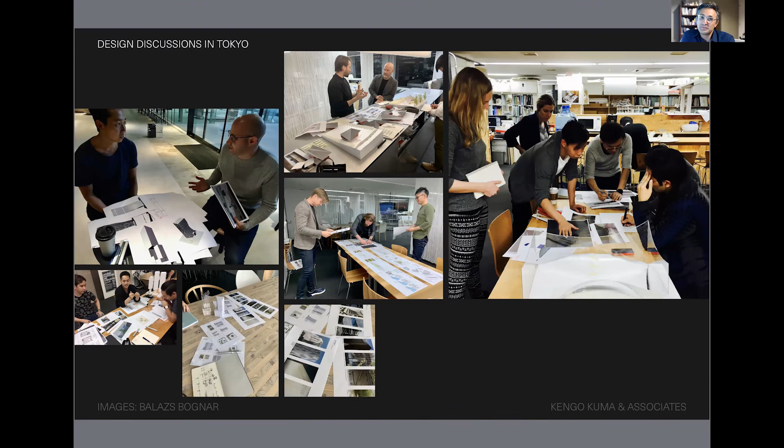Oh yeah, and thank you for these last four or five slides—those are the treat, those are actually fascinating. These are things people could spend their whole lives and never see what it's like inside, right? I've taken so many people on tours inside the office at SOM, and they're always fascinated by the process, because we always see the polished, published work, but actually this is the factory—this is where all the amazing genius ideas are being produced. So thank you for sharing these few slides at the end.